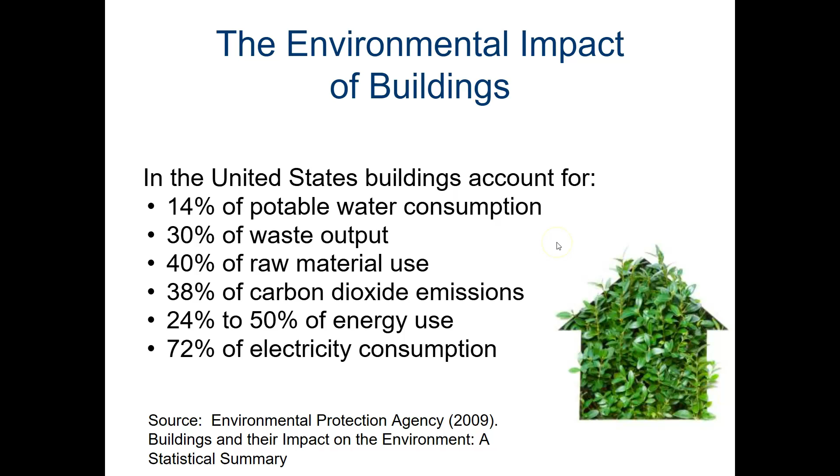So why do we LEED certify? There's a few main reasons. One is just to reduce the building's carbon footprint. It also, though, can improve productivity of the occupants just by designing things in better ways. You can reduce costs, you can receive recognition, you can receive third-party validation of an achievement, you can qualify for financials, you can receive positive marketing exposure.

So I don't have a pencil icon here, but you are going to be asked to give me at least one reason why a building or business might want to LEED certify. So you might want to still make a note of one or two of these. But once we get through the lesson, I think they're going to be pretty second nature to you.

So you might get some LEED credits by collaborating early with others and documenting that, by figuring out ways to optimize energy and water, by having decisions that are based off data. That would give you some LEED credits. And if you earn enough credits, then you can qualify for a LEED certification. We'll go into the different certifications in a minute, but that's what you do to earn credits.

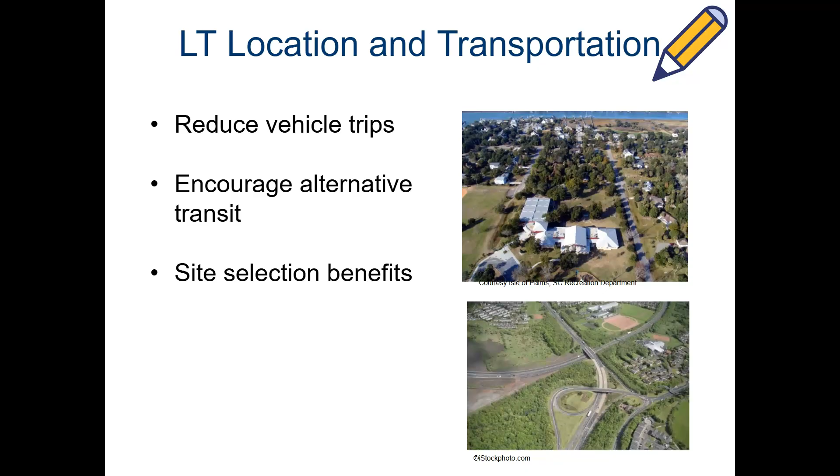You can earn credits in location and transportation by having a location that reduces vehicle trips, if you build in an area near public transportation, encouraging alternate transit. If you select certain sites that are beneficial, that maybe don't use existing farmland or things like that, you can get LEED credits. You earn enough credits, you get a certification stamp.

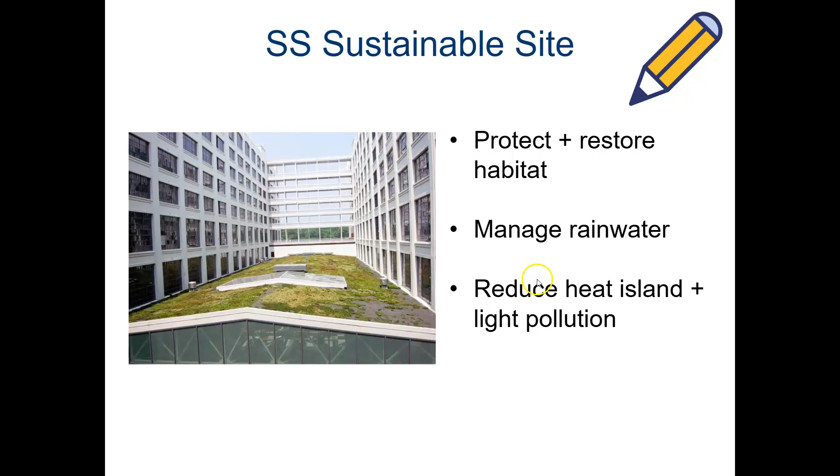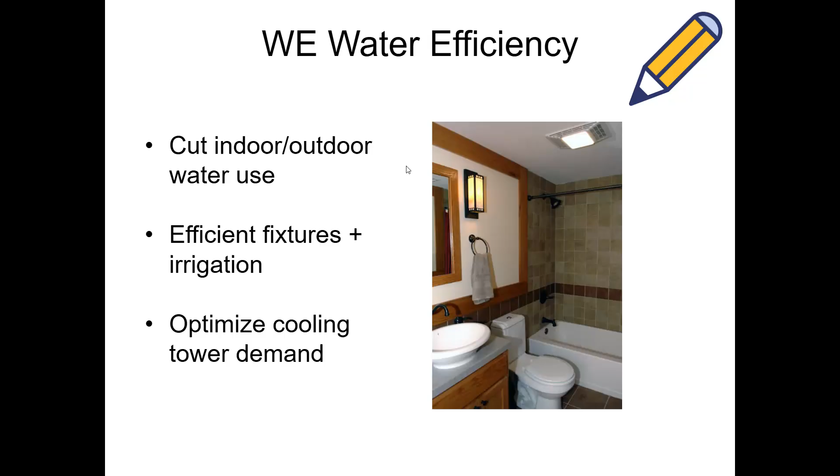You can get water efficiency credits by cutting indoor water use using efficient fixtures and efficient irrigation, like watering your lawn. Optimizing cooling, or a cooling tower, I guess it is. So you can get some water efficiency credits for that. You earn enough credits, you get a LEED stamp.

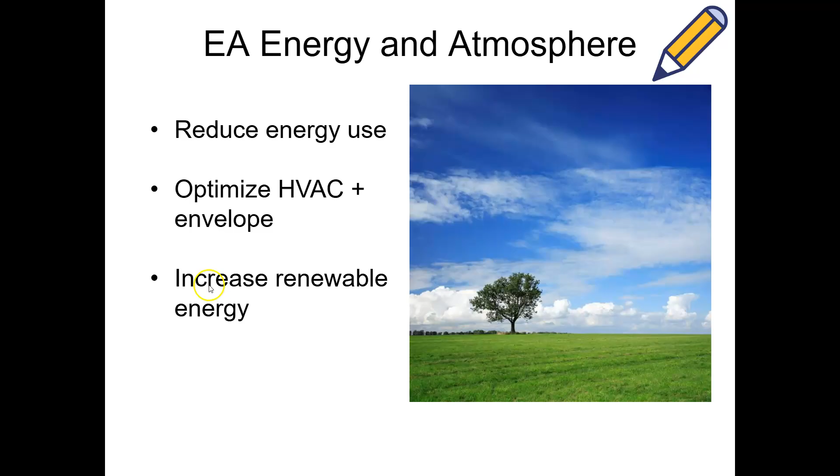Energy and atmosphere, reducing energy use. So if you have Energy Star appliances, you can get some energy and atmosphere credits. Optimizing heating, ventilation, air conditioning, HVAC, or increasing the renewable energy that you're using on your site, like maybe you have solar panels, you can get some credits.

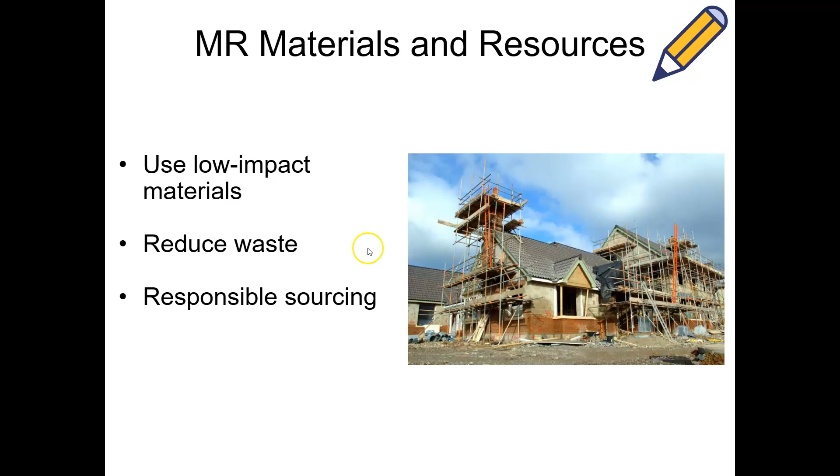Through MR, which is materials and resources. If you use certain low impact resources, or you reduce waste, or get resources from a responsible sourcing type area. Maybe that's a forest that is sort of a regrowth type forest that is used only for materials for construction. That might give you responsible sourcing credits.

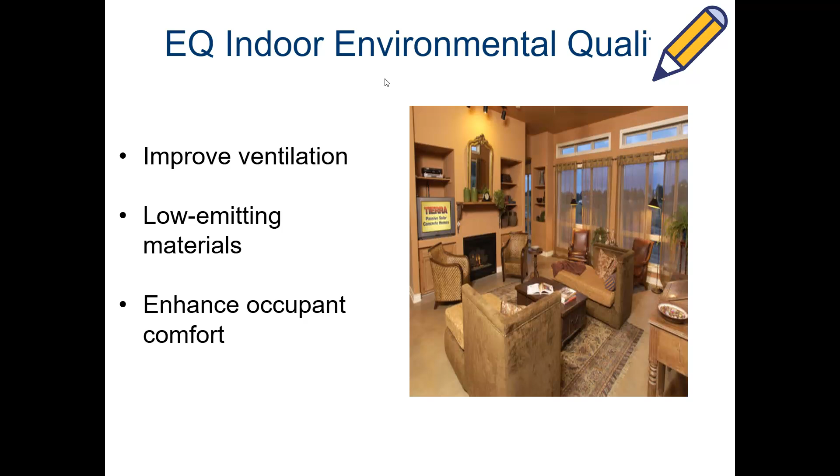EQ, which means indoor environmental quality. It's kind of cut off there, that quality. If you have good ventilation, you can see that would improve your working conditions, which I mentioned before. If you have low emitting materials, this is like toxic fumes that things emit. So if they're low emitting materials, that is a credit. Increasing or enhancing occupant comfort can give you indoor environmental quality credits. So that's why LEED design can be really helpful for the users.

You can get credits for regional priority. And this is, depending on where you live, you can get bonus credits. So if you address local sustainability issues, you might get some bonus credits. If there's certain things in the region, like here in Colorado, reducing water usage is really, really important. So you might get additional credits just for that because that is a priority.

So those are the 9 areas, and obviously you can pause it along the way so you could write those down. If you earn enough credits total, you can get up to LEED Platinum. The first number, which is 40 credits, is LEED certified. And if you have energy efficient water faucets, that can give you 1 or 2 credits. So that's just an example. If you have other things, you continue to add them, and I think it's somewhere around 80 is platinum. So it takes quite a few to get up to platinum.

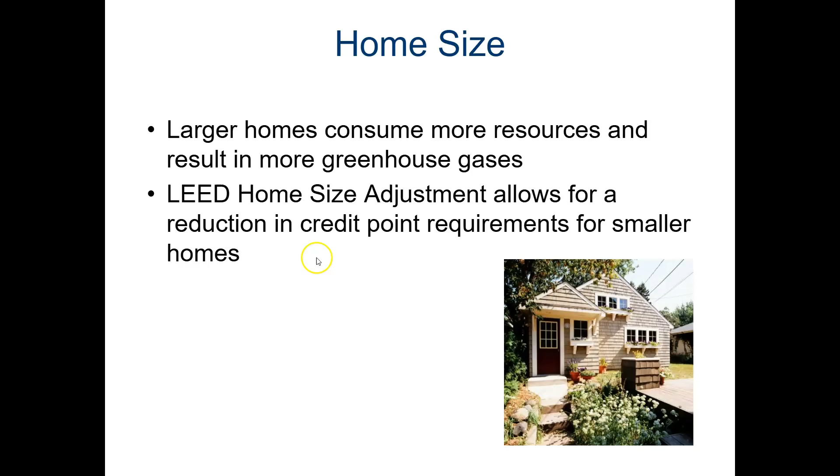The larger the house is, the more resources it uses, and so you actually have a harder time earning credits if you have a really big house. LEED home size adjustment allows for a reduction in number of credits. You are going to calculate this. You're going to figure out how big your house is that you're designing and figure out how many LEED credits you're going to get for free.

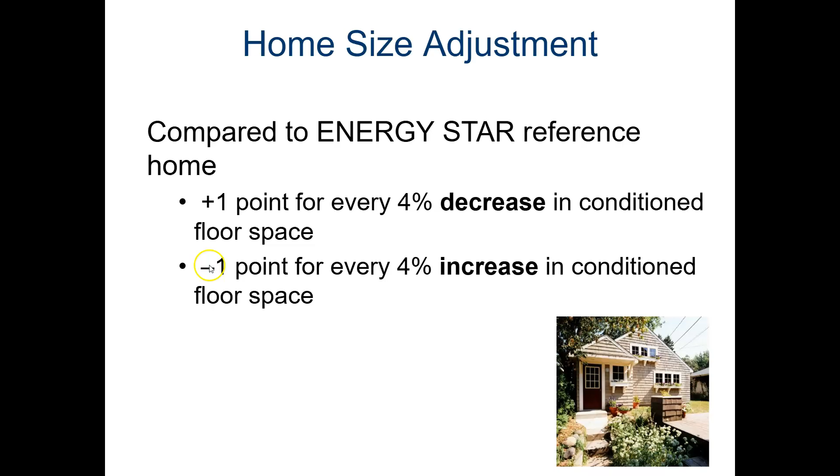So because your house that you're building in Revit is so small and it has so many bedrooms, you actually get an automatic free number of credits. It's going to be something like 8 or 9 or 10 or 11 credits for free that you start with. So you're already going to be on your way to becoming LEED certified. If you have a huge house, then you get negative credits, so you actually start in a negative with larger homes.

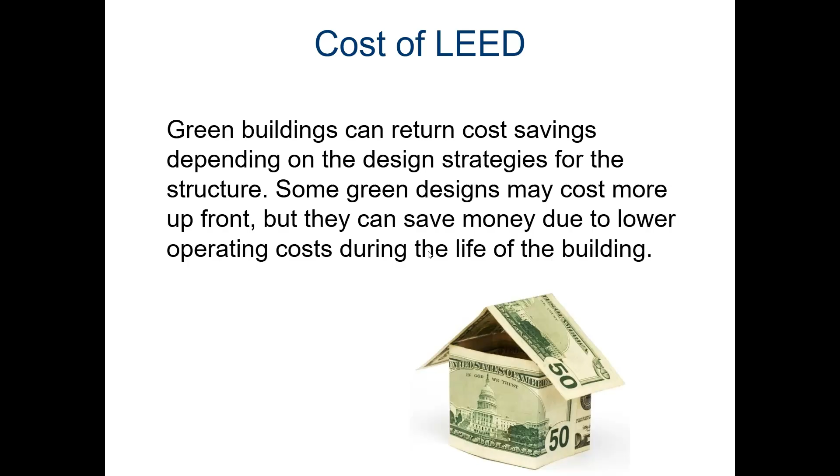So why do we do this? Well, green buildings can return cost savings depending on the structure. So some of the things that you put in to make it LEED certified cost you more money at the beginning, but they save you money in the long run. That's kind of what this is saying. So it might cost more up front, but it saves money during the life of the building. So that's why people look at it as an investment in energy savings.

You can also become a certified LEED architect or designer. You can obtain this through classes and seminars. If you're interested in this as a career, this is a really, really big deal, designing for energy efficiency. So it's something that you might want to consider down the road. And that's where we're going to end it.